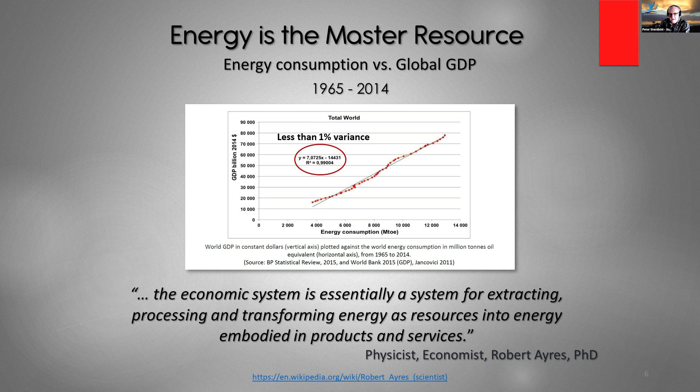Therefore, if an economy consumes more energy, it tends to grow. Conversely, it's reasonable for the opposite to be true too. As we dive further into this presentation, I think this is an important connection to keep in mind, especially if our plan is to replace where much of that energy comes from in a little more than 20 years.

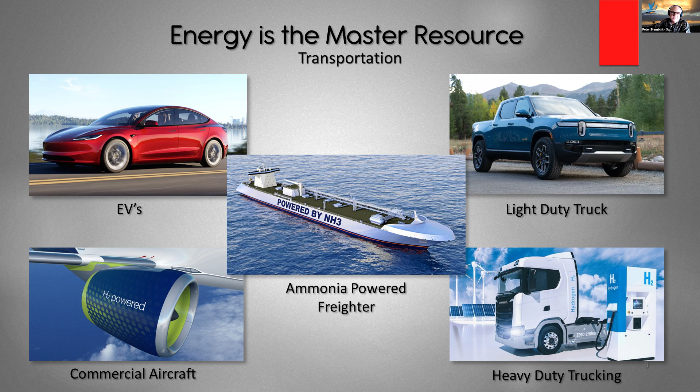So the big question is, can intermittent wind, solar, and battery systems we see being deployed at an exponential rate deliver enough power to meet our existing needs, as well as to deliver the power we know will be needed to electrify light-duty transportation, industrial transportation, and the heat-intensive industries like steel, cement, petrochemical refining, and food processing?

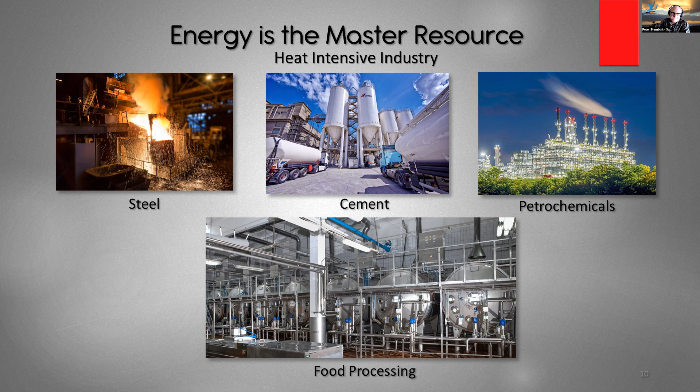Our energy reality is this. Modern civilization exists as a continuous economic activity, and the flow of energy is how and why. Right now, 3/4 of the global economy's energy is derived from fossil fuels.

And among those fossil fuels, the liquid fuels that serve as the lifeblood of modern just-in-time logistics has no replacement at scale, nor is there one on the horizon. For me, seeing the scale of these logistics is really a stunning experience.

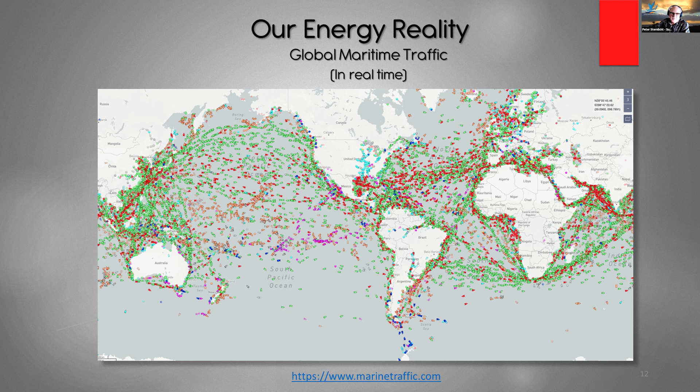This is a snapshot of maritime traffic moving the global economy from one end of the planet to the other. This is another snapshot, but this time it's global air traffic.

It's the norm to find 20,000 commercial aircraft in the air at any one time and average more than 100,000 flights a day. In July of this year, we saw more than 134,000 flights set a new single-day record. But wait, there's more. Those numbers don't include military, private, or cargo flights. Again, all of these are powered by liquid fossil fuels.

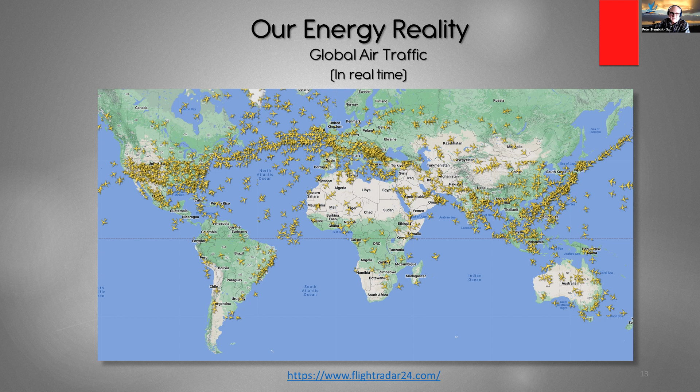We hear a lot about what electrifying light-duty transportation will do to reduce emissions. Progress in that direction is really just getting started. In 2021, less than 1% of light-duty vehicles in the US were fully electric. That's definitely changing, though. EV sales grew in the same period to 5% of all new car sales and had grown to nearly 7% of total market share by January of this year.

Today, with virtually all transportation powered by liquid fossil fuels, maintaining our current economic activity and decarbonizing at the same time means replacing that energy with portable fuels that start out as clean electricity. That will require, this is on a global basis by the way, terawatts of renewable power on top of what's needed to replace the non-renewable power we use today.

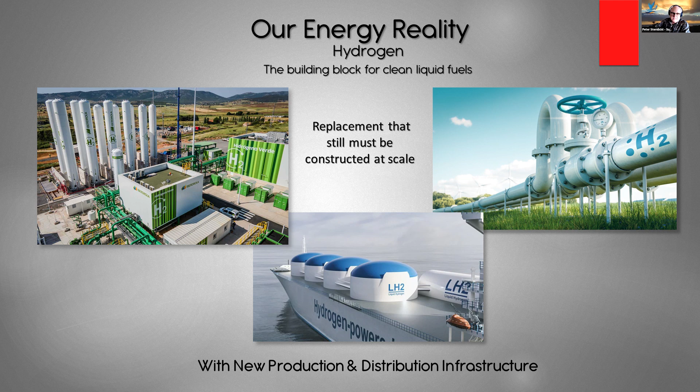The leading candidate to serve as the building block for these carbon-free liquids is electrolyzed hydrogen. But it's not just making the hydrogen or generating the initial power to produce it. It also means producing an entirely new interconnected distribution network while keeping our existing system functional as we build its replacement.

So now, having a more detailed sense of the task at hand, let's ask this question again. Can the world achieve meaningful decarbonization at the same time it constructs a replacement for the existing fossil fuel system and keep the global economy running at speed too?

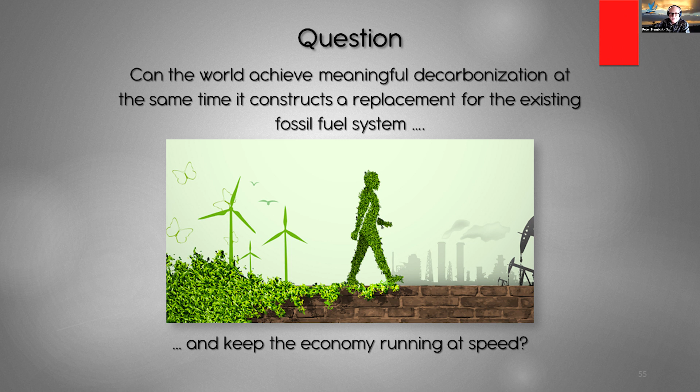So what I did was look at the relationship between fossil and non-fossil fuel consumption in our total energy mix. First, I looked at their combined annual consumption in 2000. From there, I did some simple math and calculated the ratio between the two categories. I came up with 77% fossil and 23% non-fossil.

Then I did the same for 2022. I was really shocked to see that the ratio was identical 23 years later. It hadn't even changed by 1% in more than two decades. I immediately contacted my colleague who works for the Hawaii Natural Energy Institute and asked him to check my math. He got the same thing, so I felt a little bit better.

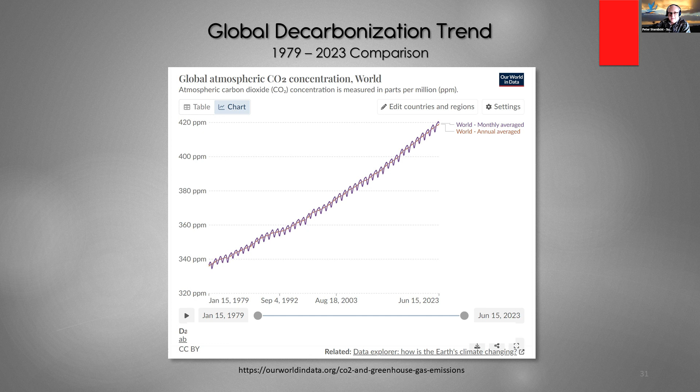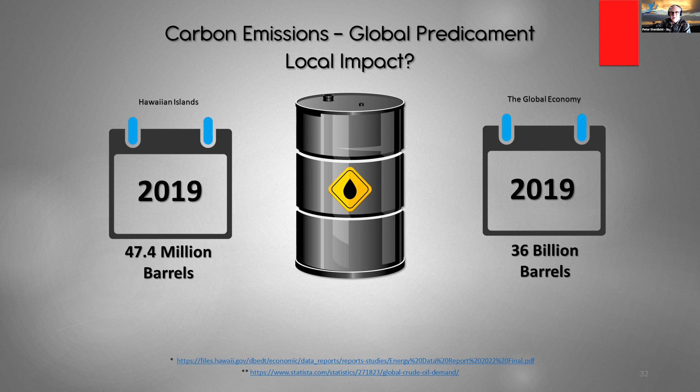Seeing this trend and understanding the emissions goals Hawaii has set for itself, I wanted to ballpark what its proportional contribution to global emissions pencils out to. Data published in '22 for 2019 showed that Hawaii's petroleum consumption was slightly more than 47 million barrels that year. By comparison, global consumption for the same time frame was about 36 billion barrels, or around 100 million barrels each day.

That means over the course of 2019, the oil Hawaii consumed was approximately what the world consumed in little more than 11 hours. For the purposes of this discussion, a reasonable conclusion would be that carbon emissions would track in similar proportions. Out of that oil consumption, about a third of it was used for power generation, meaning a year's worth of Hawaii's grid power emissions was produced by about 16 million barrels of oil products. That approximates what the world emits in about 3 hours and 45 minutes.

And I don't mean this comparison to be rhetorical. While it may seem simplistic to some, I still see this kind of comparison being relevant, and I'll illustrate why as I continue.

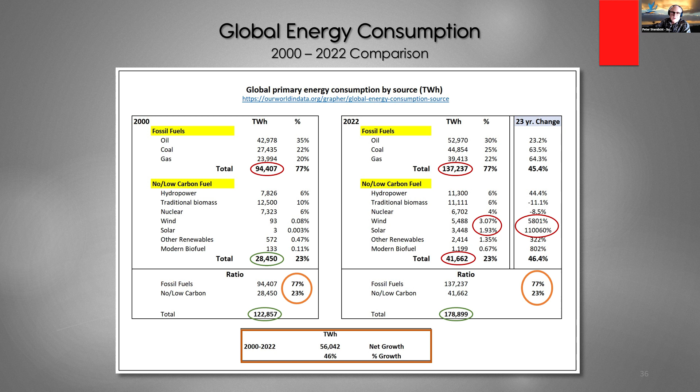Looking at the implications that come with this analysis, quite a few questions come to mind. For example, given the urgency to combat climate change, why is the world consuming more and more fossil fuels? It's not like governments around the world don't understand the predicament we face. When I think about it, I'm pretty sure that within our economic system, those who invest in it and govern it believe growth is essential. And without that growth, their venture is failing. As we've seen, growth always involves increased energy consumption. What else are they going to use?

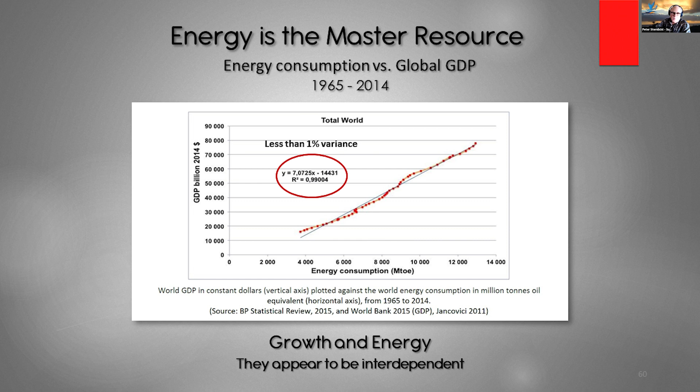Okay, so hypothetically, let's take the predicament of climate change to an extreme and imagine what would happen if the world stopped consuming fossil fuels today. I see reports where thousands and thousands of people would say, do it in a heartbeat.

Obviously, we're not going to do that. However, it does open up the possibility that if the world doesn't decarbonize at the same rate Hawaii does, and knowing we're not able to move the climate needle on our own, maybe we have the flexibility to consider things like long-term systems resilience or economy-related opportunities as potential outcome goals.

For example, it might make sense to model the scale a distributed intermittent system would need to achieve to replace all our grid power on each island. How much power would we need to produce the volume of clean liquid fuels we forecast? And how do we do that within varying economic scenarios like domestic-only production or export scale production?

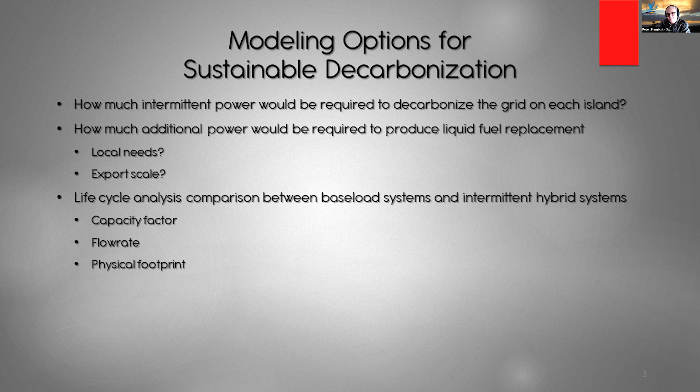Maybe we could also compare firm baseload power generation systems and their life expectancy with those of intermittent systems. We know the capacity factor, flow rate, and footprint issues fare far better with these systems than with intermittent.

Another factor that could be modeled is whether the exponentially growing raw material supply chain for solar, wind, and batteries will remain economically viable when the time comes to replace components like battery backup systems. That could actually begin as soon as the mid to late 30s.

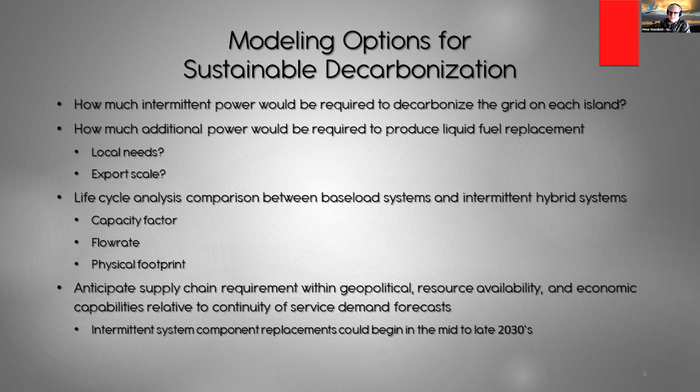And then there's the question that's often overlooked. What if carbon emissions isn't the only reason to electrify the global economy? This question specifically targets the economics surrounding liquid transportation fuels. We know petroleum is a finite resource that appears to be reaching the upper limits of its daily flow rate, especially as we now consume it at a rate of nearly 37 billion barrels each year.

The reasons and exact timing of that limit are widely debated. We'll look at the subject in more detail later in the presentation.

I think one of the problems surrounding our energy transition is public perception and understanding what renewable energy really is. Most people think that solar and wind farms are renewable energy. The fact is, renewable energy is not the same as the systems used to transform that energy into work.

Solar panels are not renewable energy. Wind turbines are not renewable energy. Batteries are not renewable energy. The renewability of systems is not the same as the renewability of their energy inputs.

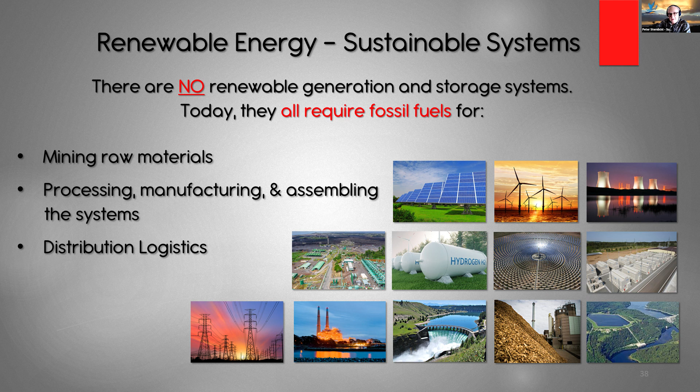Every system we deploy capable of transforming renewable energy into usable work requires fossil fuels to mine, refine, smelt, manufacture, and to transport around the world. And once again, liquid fossil fuels serve as the critical link in that supply chain. It bears repeating, there simply is no replacement for petroleum at an industrial scale, nor is there one in sight.

Let's consider today's renewable energy system supply chain. If we accept that petroleum is part of every process, it's important to remember that the supply chain for every renewable energy system starts with mining.

What can we expect from the renewable energy supply chain going forward? Is there a backup plan if mining and refining and manufacturing systems can't meet the demands of our climate goals? As the world transitions from fossil fuels to renewably generated electricity, how confident are we that upstream systems production can reliably keep pace with the exponential demand growth?

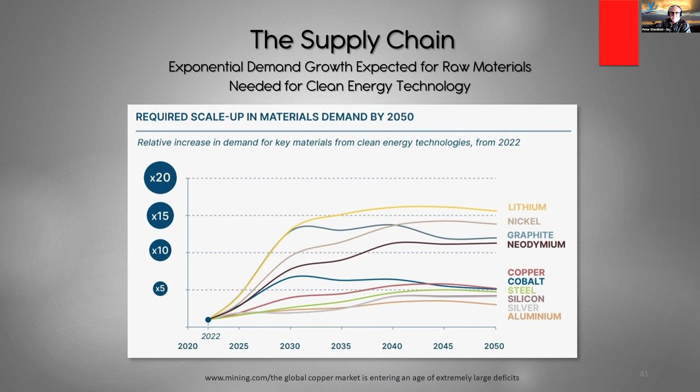China's been buying up rare earth mining rights across Africa, including Guinea, Zambia, South Africa, Zimbabwe, and the Congo. China also produces about 80% of the world's gallium and about 60% of the world's germanium, materials that are critical to the manufacture of semiconductors.

Most of the world is looking at solar photovoltaic systems to generate clean electrical power. Solar-grade polysilicon is the primary material that enables these systems to generate power. Today, 75% of the world's processed polysilicon comes from China, as do 80% of the completed panels.

These systems are increasingly being deployed along with grid-scale battery backup systems, which use many of the same raw materials as EVs. The IEA forecasts the existing global EV fleet of approximately 26 million vehicles will more than double to 60 million by 2026.

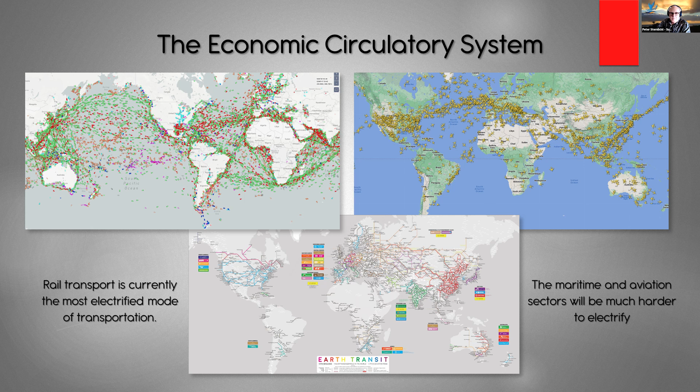As we discussed earlier, there's the critical matter of the liquid fossil fuels we use to move the global economy from place to place. Among them, rail is currently the most electrified mode of transportation. According to the IEA, 45% of rail transport was powered by electricity in 2022, making it the easiest mode of transportation to decarbonize further. Maritime shipping and commercial aviation will be significantly more difficult to electrify.

Again, hydrogen is the prime candidate from which to produce clean, liquid transportation fuels. Challenges there include how to reliably source the volume of clean electricity needed, and critically, the equipment that can use these new fuels—those haven't been built yet.

Each year, Rystad Energy, a well-respected global energy analytical company based in Norway, consolidates the data published by the IEA, the EIA, and the BP Statistical Review, then issues their own assessment. In each of the last 2 years, the data showed that recoverable oil reserves contracted by 9% year over year. That's not what was consumed—it's what remains to be extracted within economically viable parameters.

They go further to suggest that by 2050, the daily flow rate of oil will be half of what it is today. They also offer an upside: by burning half of what we do today, carbon emissions will be significantly reduced. If accurate, that will also impact the size of the global economy.

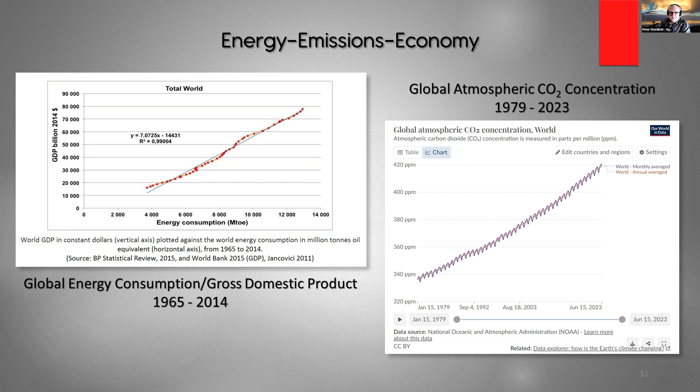When it comes to the future of energy, Hawaii is blessed. We have options most of the world does not. We can make decisions that might help us minimize the undeniable impacts of climate change, diminishing natural resources, and what looks like an inevitable economic contraction. We have the option to develop baseload power systems from geothermal heat, an indigenous resource that can deliver a lot of power. In doing so, we might be able to transition from a tourism and military-based economy to one capable of exporting clean energy to part of the world that faces much greater challenges than we do.

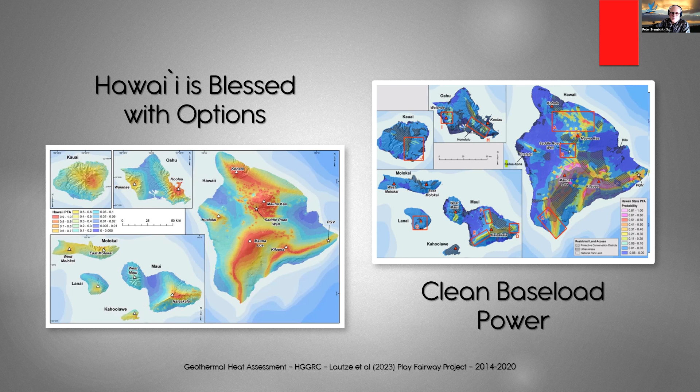Making these decisions will not be easy. They will be controversial, and time to make them is not on our side. Whatever we would do will require some well-informed, honest, and determined leadership. Mahalo.

Peter, thank you. Now you see why I pick folks like Peter to be people I want to associate with, because they're a lot smarter than me. No.

But I want to point out a couple of things that Peter brought up in his presentation, and I've kind of picked up some of the stuff from chat too. The part about China controlling so much of the rare earths and materials that we need to move forward with technology brings up the point of our current relationships in the Pacific vis-a-vis China and Taiwan being strained right now. And the chip shortage that affected our automobile production not so long ago was directly related to just what Peter brought up, the supply chain and the power that China has over much of the supply chain and critical elements that we need. So we need to be paying attention to our global political endeavors as a nation with China and other countries.

Another thing that I saw coming up in the chat was biofuel. And the one caution I would use is that we went through this with ethanol. When you start using food things like corn to make fuels, you also impact the food chain and the availability of food. So if we do look at biofuels, I hope we're looking at byproducts of food like corn stalks instead of corn, and other leaf substances and things that we can do biofuels from. And also, like I'm sure you'll hear more, Peter mentioned it, but more from Dan, is using hydrogen to make liquid fuels, which is a chemical process which is already proven.

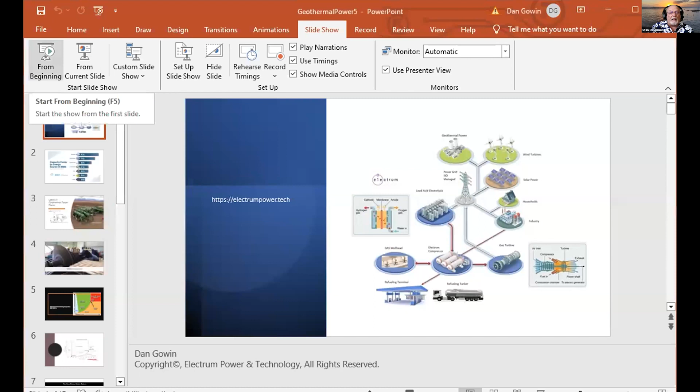I'll turn it over to Dan for his presentation. And while he's setting it up and getting his slides set up, I'll just add that Hawaii is in a unique place. We are in the middle of the ocean. I call our 2,500-mile moat, but salt air is very hard on ocean-based things like wind turbines, like wave machines. The wave energy projects that have been done off of Kaneohe Marine Corps Base, Hawaii, have proven to be very maintenance intensive and a tough challenge. But then there's also the potential for undersea turbines that don't go off of waves, which are intermittent and wind powered, but go off of sea currents, which are powered by the moon and tide changes, and are a possibility that Dan has actually looked into, and we've done some presentations on that.

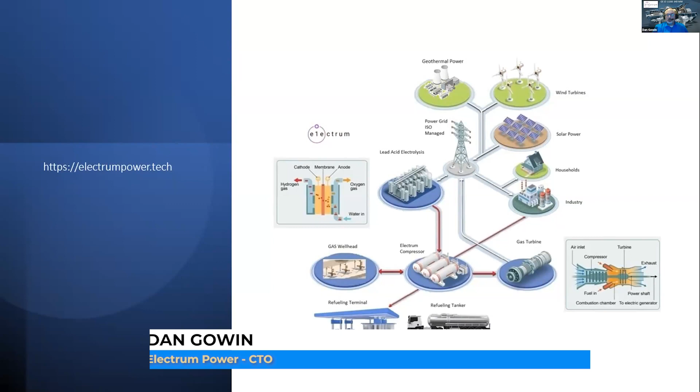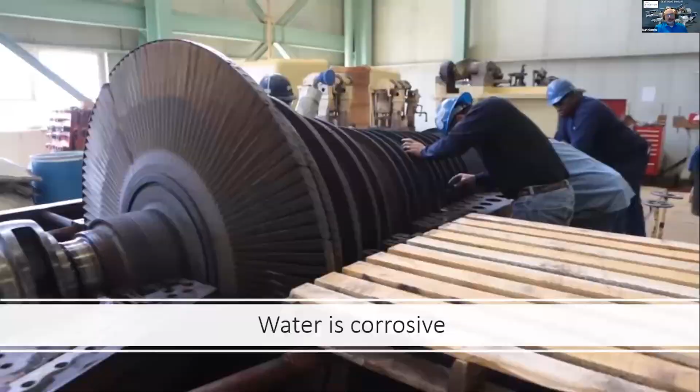Working at the Crane Naval Surface Warfare Center in southern Indiana, I ran JDAM, Tomahawk, and Trident. I ran the Tomahawk cruise missile for 6 years. Whenever I left the Department of the Navy, I went to work for Indianapolis Power and Light. My mission there was to automate everything that was bolted down, all the way from coal-fired power plants to grid control systems, all the way down to the maintenance system that linemen use for maintaining the power grid in Indianapolis. From there, I went to a place called Mid-Continent ISO, known as MISO.

I'm the guy that designed the computer system that controls the power grid for 26 states and parts of Canada. And for those of you who may ask this, I am one of the survivors of the 2003 Eastern Power Grid blackout, just to let you know that.

From MISO, I ended up at General Electric at their alternative fuels program. When I first arrived, the CF6 jet engine could only burn jet fuel. By the time I left, it could burn 22 fuels, and I'd already converted 4 coal-fired power plants over to gas turbine. From there, I was at Eli Lilly.

I ran payroll and the financial system at Eli Lilly for 8 years. After that, I was asked to get into the energy sphere because of a lot of the pressing energy problems we're having. That was in 2013. That's when it was becoming apparent that, looking at 10, 20 years out, the supply of fossil fuels was going to become ever more problematic and probably cause a lot more issues than what things were being solved.

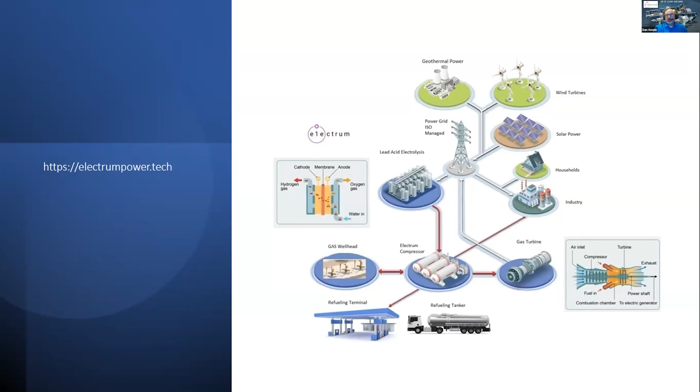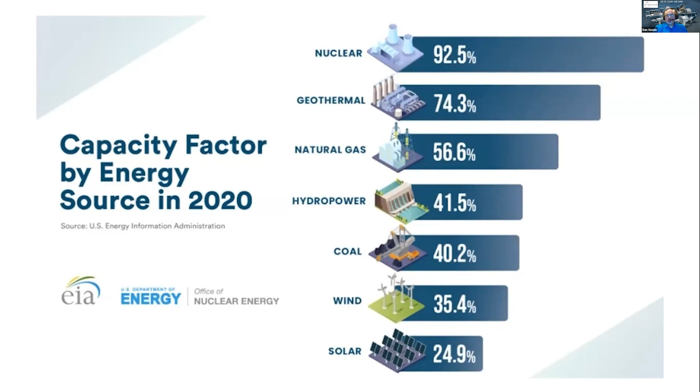The Raft River Power Plant was brought online in 1980. Originally, it was outfitted with a Westinghouse 140 megawatt steam turbine. That steam turbine was used all the way up to the year 2000. In 2000, Ormat bought the power plant. They removed the Westinghouse turbine and replaced it with an Ormat turbine that only produces about 20 megawatts worth of power.

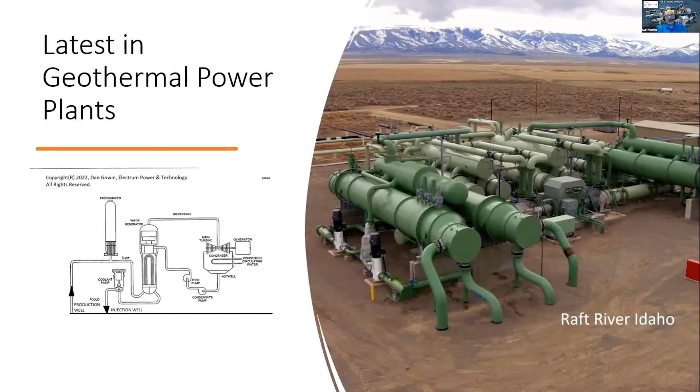The binary geothermal power plant has some differences from the original geothermal power plants. The original plants took live steam and used it to drive the turbine. What you see right before you is one of these 110 megawatt steam turbines.

The problems with using water directly from a geothermal well: number one, you have a lot of minerals dissolved in the water, and as the steam expands inside the turbine, it tends to lay those minerals down on the blades. The other downside is that even though the turbine is made out of stainless steel, after 10 years you can see the corrosion that water causes on the turbine.

So that's one problem you have with using water directly out of geothermal, or even if you're using a coal-fired power plant or a nuclear-fired power plant, you're going to have the same corrosive effect on your turbine.

The second issue has to do with what we call supercritical steam. In order to use steam to drive a turbine, you have to drive the temperature of the steam up to 705 degrees Fahrenheit, or 374 degrees Celsius. The only downside is that the maximum technical drilling temperature is 482 degrees Fahrenheit, or 250 degrees Celsius. I think Baker Hughes is able to get up to 300 degrees Celsius, but the point is we're not able to drill deep enough to get the temperatures up to bring steam to a supercritical temperature to drive a steam turbine directly.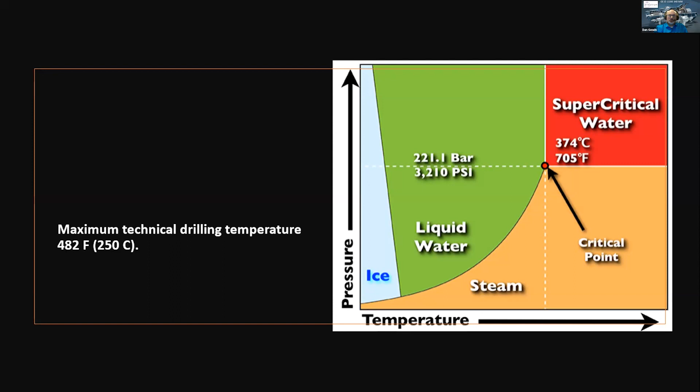Now, there actually is a solution to both of those problems, and I'll show you what they came up with at the Raft River Power Plant. Inside the binary geothermal power plant, what they did is take the primary fluid coming out of the ground and put it in a closed loop, running that water through what's called a heat exchanger. I've got a diagram and I'll show you what it looks like later on.

What they actually used to drive the turbine is a fluid called pentane. Believe it or not, most of you have actually been exposed to this fluid - about 20 to 30% of gasoline is pentane. They blend a lot of different things together to make gasoline, and one of them has to be pentane. Pentane goes to a supercritical state at 196 degrees Celsius, or 385 degrees Fahrenheit.

What that also indicates is you don't have to drill geothermal wells as deep as you would with steam. So currently we don't have the technology to drill wells deep enough for using steam to drive a steam turbine, but we do have the technology to use pentane to drive a turbine. When you bring those factors together...

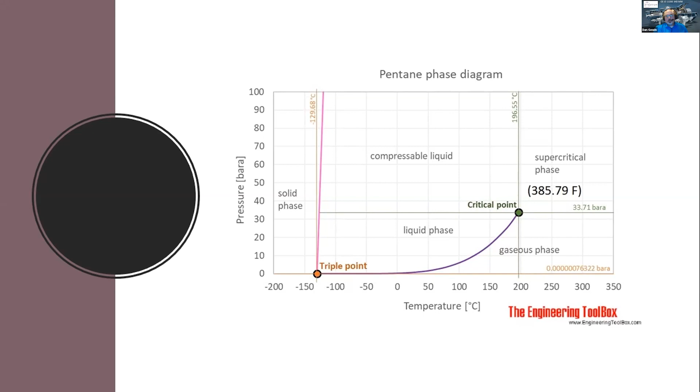...you get this here, which is called the binary geothermal power plant. Now, remember what I said - a lot of the guys that put this together used to run submarines, mainly nuclear-powered submarines.

So what you've got here is your primary loop: you're injecting cold water down into the ground, and depending on where you're at, that will dictate how deep you have to actually drill to make this work. So you've got cold, dense water going down into the ground, then the water comes back up in what we call a production well. 440 degrees Fahrenheit is hot enough to do this. Understand that's a complete loop.

It's also pressurized, for two different reasons. One is you have to keep the injection well and the production well pressurized to keep the fracture network deep underground in place so it doesn't collapse on you. The other reason is that pressurization keeps all the minerals dissolved in the water, so you don't have the scaling issue that a lot of the older generation geothermal power plants have.

Now, that water circulates through what's called the vapor generator, which is essentially a heat exchanger. Inside that heat exchanger, the pentane is brought to a boil, brought up to that supercritical state, and you can use that pentane to directly drive your turbine.

The point being here is your turbine, the generator, your transformers, all the things that you attach to the grid - the only thing that's changed essentially is what you're using to drive the turbine, whether it's nuclear powered or coal fired powered. By switching over to this, you can have a power plant that generates the same amount of power using the same type of equipment, the same technology.

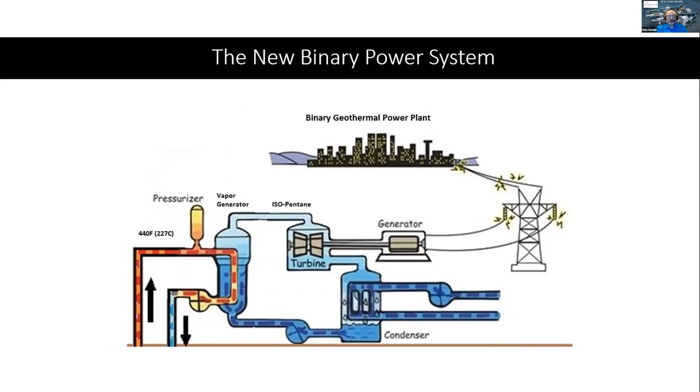So what is this all based on? Well, it's based off some basic geology of the planet Earth - every 2,000 feet you drill down to the crust, the temperature increases by 30 degrees Fahrenheit. The state of California has a geothermal power course you can take, and according to their course, for every kilometer you drill down in the crust, the temperature increases by 28 degrees Celsius. So temperature is proportional to how deep you drill.

In the case of this type of power plant, you would not place it in a geologically unstable area - you need a geologically stable area. That's because you're drilling multiple wells down to form what we call an engineered geothermal system, where you drill one well injecting water down into the ground, and production wells where the water's coming back up, continuously circulating that water back down into the crust.

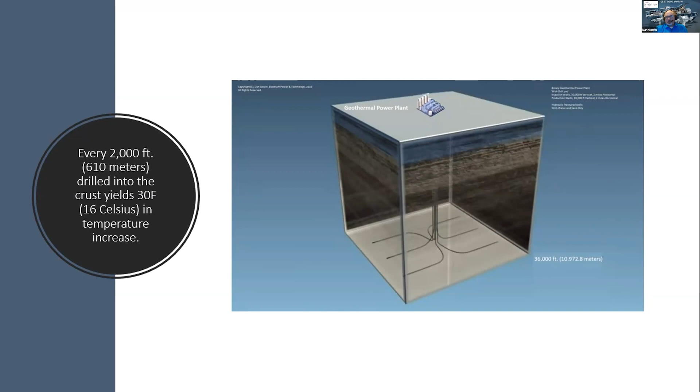This type of power plant, you could take, for example, a 1 acre plot and drill up to 12 wells off that same 1 acre plot.

As an example, this is one of Hitachi's 110 megawatt turbine plants that I've been running some models on, where I converted it over to a geothermal power plant. Understand that the drill pipe going down into the ground should be an 18-inch diameter, just like what we did at Raft River, because the key isn't just to have hot water come out of the ground, but to have a quantity of water coming out of the ground so you can use that to transfer the heat over to drive the turbine.

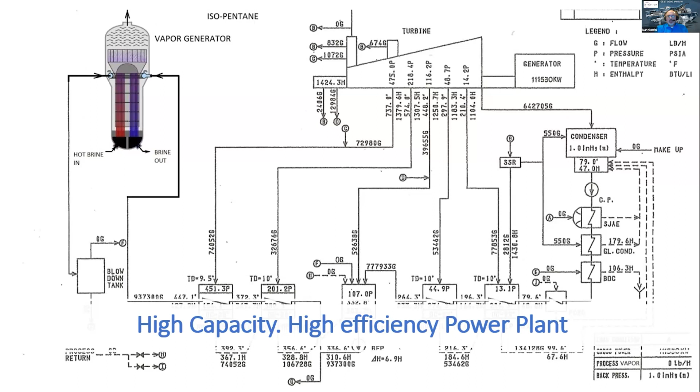Now, what are the economics of this? The Department of Energy puts out a report every year called the Annual Energy Outlook. The last one I'm showing here is from 2022. The two important columns are, on the left, the capacity factor, and on the right, the total levelized cost per megawatt hour.

Here you've got ultra supercritical coal, combined cycle, which is your gas turbine where you converted an old coal-fired power plant, adding a gas turbine using the exhaust to drive a boiler to produce steam to drive your steam turbine. Then you've got advanced nuclear, which is your small modular reactors, your geothermal, and your biomass - that's where you're burning wood chips inside a converted old coal-fired power plant to basically do the same thing.

Now, notice here, they've upgraded geothermal up to a capacity factor of 90%, because the Department of Energy recognized that binary geothermal power plants are just as reliable as the reactors.

Now, on the right-hand side, you'll notice the costs are quite significant. An ultra supercritical coal-fired power plant is $79 per megawatt hour. Your combined cycle plants only come in at about $44 per megawatt hour, mainly because natural gas is currently cheap right now - in other parts of the world, natural gas is a lot more expensive than here in the United States.

And then you've got advanced nuclear, which turns into some of the most expensive power. Originally, when they were looking at small modular reactors, their costs were coming in about $50 per megawatt hour. What drove the cost up is when you consider what you do with spent nuclear fuel - do you store it, do you recycle it, and so forth. That drives up the cost of nuclear power directly, once you go through the entire complete cost. Then you come to geothermal.

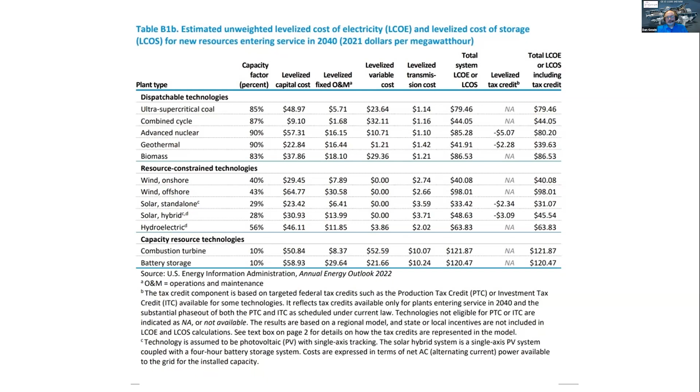Okay, what's next here? This one has to do with what we call a value cost. You've invested all this money into a power plant, let's say a coal-fired power plant. You run it for 50 years. After that, what is the plant worth after you've depleted it, after it's used up its useful life?

For example, it's not really that surprising when you look at a coal-fired power plant that the equipment, everything there, is probably only worth about 47 cents on the dollar.

You get the same problem with nuclear power, mainly because most of the cost of implementing nuclear power is not in the fuel of the reactor. It's really in the building that surrounds the reactor and all the safety equipment. One of the aspects of nuclear power is it does a lot of damage to structures, concrete, steel, and so forth. A lot of that equipment, after 50 years, you can't reuse other than having to jackhammer it up and put it into some kind of low-level storage location.

Now, out of all the power plants, it's rather surprising: it shows here that a geothermal power plant is actually worth more used than it was brand new. The reason is because when you greenfield and build that power plant to begin with, most of your initial cost was in drilling those wells.

Once you drill those wells, they're always going to be there.

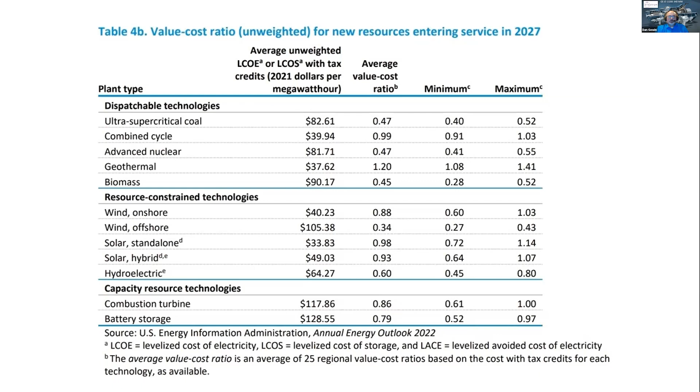Now when you look at solar panels and hybrid electrics, especially a standalone solar panel, why is that worth 98 cents on the dollar? Well, that goes back to the precious metals and rare earth elements used to construct your solar panel. That's why those have a higher used value.

Okay, so the next part of this goes back to some studies that Sandia National Labs, part of the Department of Energy, did. One thing the Department of Energy was rather surprised about had to do with the United States and our history with hydrogen. When you look at hydrogen and the quantities you'd have to produce to replace fossil fuels, the first thing you run into is a quantity problem.

That turns into a storage problem because of volumetrics, since you're trying to store a gas. Surprising to a lot of people at the Department of Energy, they found out that the United States has a history with hydrogen dating back all the way to the 1840s, long before the natural gas system was ever installed.

Surprisingly, they found out that even back then they were having issues storing hydrogen because of the volumetrics of the gas. The Department of Energy found that these old town gas systems stored the gas underground for a lot of different reasons—one has to do with volumetrics, but the other had to do with safety. The safest way of storing a lot of gas is underground.

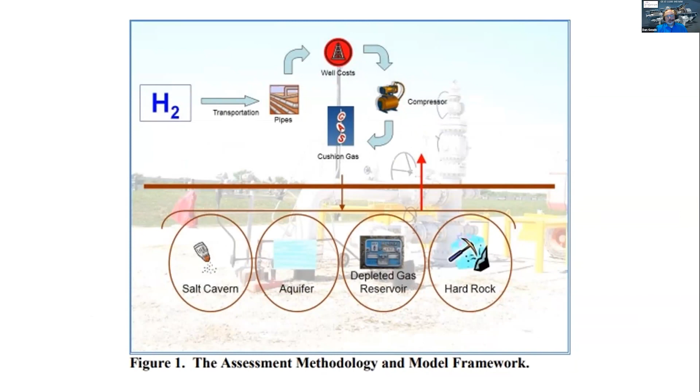That's basically an offshoot of the depleted gas reservoir technology. What they came up with starts out with a set of charts, mainly the studies they did for Houston, Detroit, Pittsburgh, and Los Angeles. If you're going to get 100% sizing, or market penetration, replacing all the diesel and gasoline in the city of Houston, you would have to be producing 159,292 kilograms of hydrogen in a day.

You would have to store that gas in depleted gas wells, and you would have to have a cushion gas of about 19 million kilograms. And of course, you can look at the volumetric amount of gas.

If you calculate, say for example, you're going to use electrolysis, using electricity and water to turn water into hydrogen gas. For the city of Houston, you would have to have at least 300 megawatts worth of generating capacity for turning water into hydrogen, for storing that much gas per day.

In actuality, you wouldn't go with 300 megawatts strictly. You would probably build 400 megawatts worth of generating capacity, not only for the amount of gas you're putting in storage for backup power for the grid, but also for providing transportation fuel for that city.

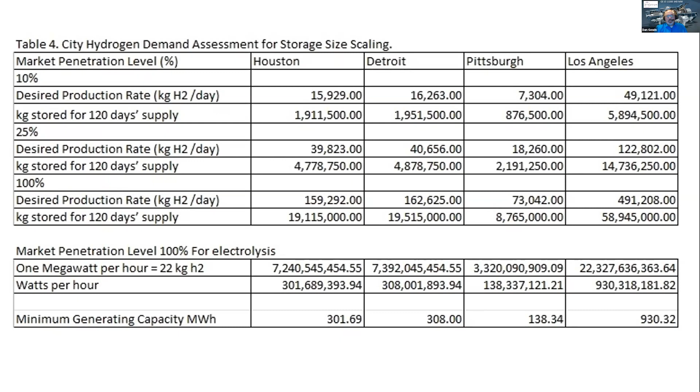Now you'll notice Pittsburgh is sort of on the low end, Los Angeles is up on the high end, almost a gigawatt worth of power, and Houston and Detroit are basically in the middle. Each one of these graphs is calibrated to the amount of population in the city.

So for example, Houston at 100% penetration has 3.8 million people. That means you probably have at least 4 wells to store your gas, and probably at least 1 or 2 service stations associated with each one of those storage wells for providing enough gas. I'm not sure how many people, Stan, how many people live in Hawaii?

Is that in the island where you're living, about 2 million? Close to Pittsburgh. Yeah, okay. We're less than that, but we're in the 1.3, 1.4 million right now, statewide.

So you guys could probably build, say, two 100 megawatt geothermal power plants, and that would provide you with more than enough hydrogen to provide the transportation fuel for trucks and cars throughout all of Hawaii. And I'm not talking about just for fuel cells.

There's an entire group right now - I think Ford and also Toyota are building internal combustion engines that burn hydrogen. So most all your transportation fuel and backup power for your power grid could be provided this way.

The other aspect of it too, and this has to do with what's going on there in Hawaii, is that there is an ability, even with the geology you do have there, that you could build synthetic gas storage by using horizontal drilling and fracking your basalt, using high brine content salt water to frack it with. It really has to do with the reaction between the basalt and the brine itself.

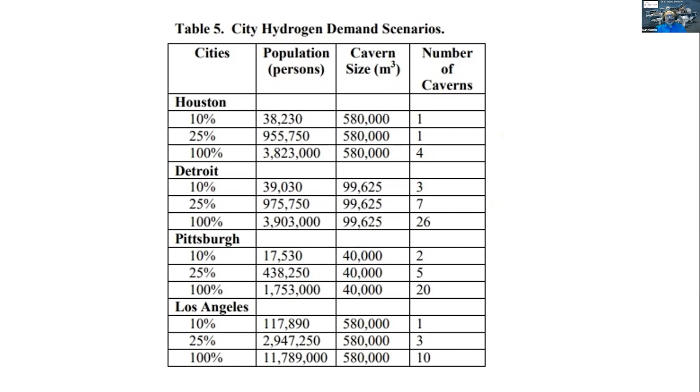And I've seen some estimates that go as high as maybe a couple terawatts. The point being, this is a type of power source that could be deployed anywhere in the United States to produce electric power. The other advantage the geothermal power plant has over other types of power plants is you don't have to worry about fuel economy. When you're running coal, nuclear, gas, even biomass, you have to worry about how much fuel you're burning up. Well, in geothermal, you're tied into an infinite power source.

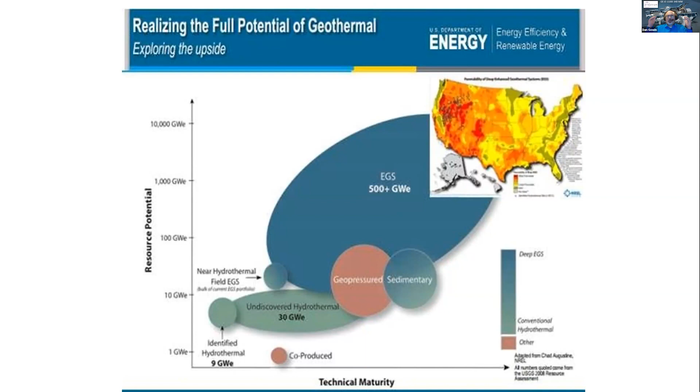So you can afford to run that power plant very inefficiently. What I mean by that is it's better to run a power plant at full power all the time. That way the thermal stresses and everything is even on the plant. It actually helps keep the equipment from wearing out. What really wears out any type of machinery is ramping it up and down, trying to do load following.